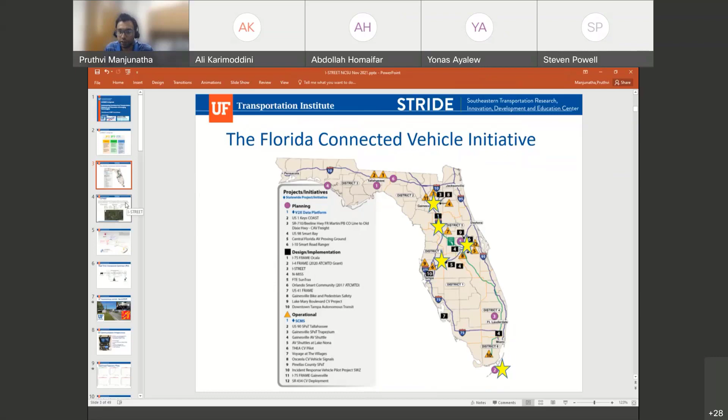We are everywhere. So within Gainesville, this is our live map. If you go to our website, you can see this live map. We try to keep it updated every few months or so in terms of new sensors being equipped, new RSUs coming in, new equipment like radar or lidar. We try to geotag it to a specific intersection or wherever we are using it. As you can see, there are a number of projects going on.

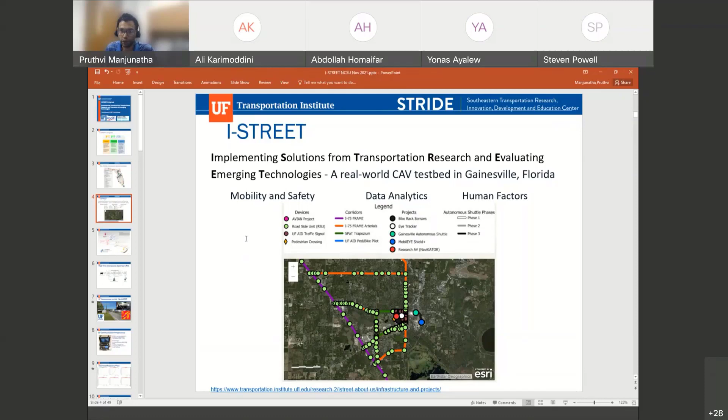So I told you today is going to be more of a story of I-STREET. We'll use this as a roadmap for our presentation today. So this is how the presentation is going to flow.

So we started out in 2017. I'll go through the key projects, and then we'll end up with present day and future. Back in 2017, FDOT was figuring out this CV, AV, and CAV terminology being thrown around, and they wanted us to do a simple literature study to see where the state of the art was at that time, and how to bring Florida to the forefront of this.

So when the conversation picked up in late 2016, early 2017, the city of Gainesville, UF, and the Florida Department of Transportation sat together and gave birth to the I-STREET program. One of the first few funded projects under the I-STREET program was co-funded by both Florida DOT and the National Science Foundation.

What it does is take input from different sensors, be it video, radar, lidar, or DSRC signals, and fuses them all together to come up with a reliable vehicle arrival stream. Once we get that reliable vehicle arrival stream, we have developed a system of optimization algorithms to come up with two different things.

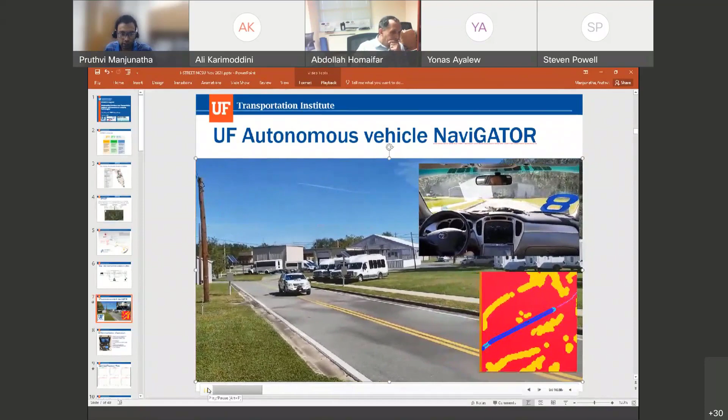So this is our custom AV. We also came up with our own custom OBUs — we built this radio kit ourselves. Then we took it out to the field and did the testing at the DOT facilities.

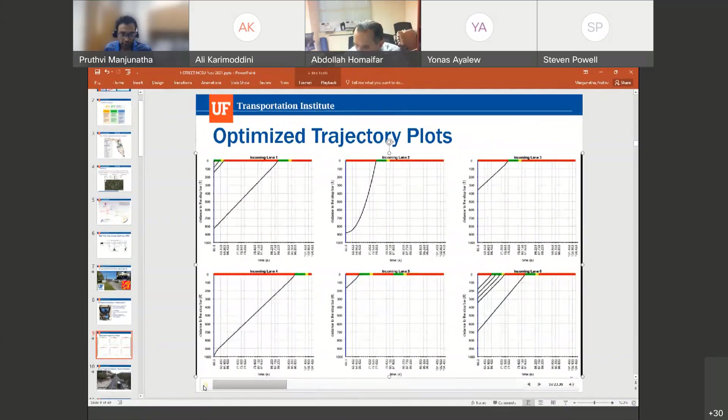So this is how a typical output of recommended trajectories looks like. With every iteration of the software, we are thinking about the best way to design these trajectories for smooth movement, without having to run the optimization routine n number of times. We are always trying to improvise on how this trajectory planning looks.

This is a co-funded project by FDOT and NSF, and we got funded again a couple of years ago to add pedestrians and lidars into the mix. So this is a living, breathing project we intend to keep going.

So once projects like that were born, FDOT also funded the I-75 FRAME project, where FDOT installed a number of roadside units on selected sections of I-75, as well as the arterials that connected to I-75.

Following that, FDOT funded multiple projects. One is the Gainesville SPaT Trapezium project, and the other is the Gainesville Pedestrian-Bicyclist pilot, which is basically a number of CV applications related to pedestrians and bicyclists.

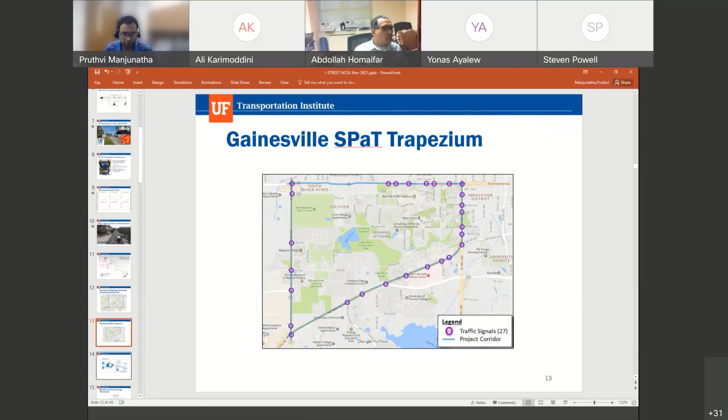So we developed this data pipeline to automatically get not only the roadside unit data and logs from the roadside units, but also use ATSPM data and loop detector data. All of this gets pushed into our AWS cloud, where we store and process it, and we've developed an algorithm to convert loop detector data into turning movement data.

Once we manually edit each signalized intersection and run this algorithm, it automatically generates turning movement counts from the loop detector data and any other sensor data that is stored on our cloud.

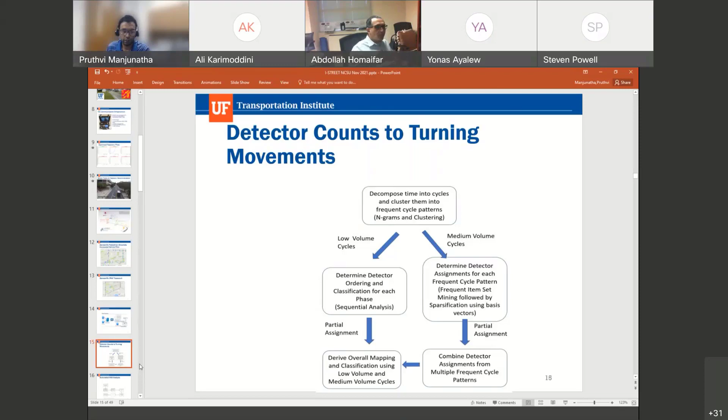So since we work with the McTrans folks who are associated with UF, who housekeep the highway capacity software, we also have access to the backend of the highway capacity software.

So what we've done is created a system where we can automatically convert loop detector data into turning movement data, which is then automatically input into our highway capacity files for each of these intersections. Whenever we want, every month or every week, we can monitor the level of service of all of these intersections, so instead of just doing one before and one after period, we have n number of after periods, and we can do a continual evaluation.

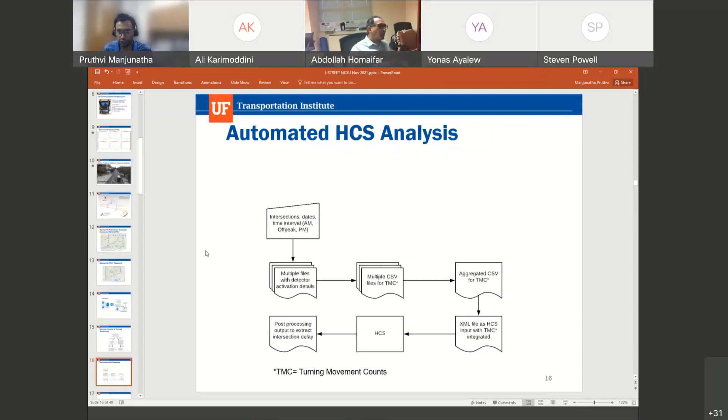So we developed this tool, and we used it for this project to monitor the health of this trapezium network over a period of time. I also have some interesting results to show from this study.

But now that we have this tool, we can just, with the click of a few buttons, continue to keep monitoring this network for however many months we want at a relatively low cost, and keep seeing the effects of such a CV deployment over a period of time.

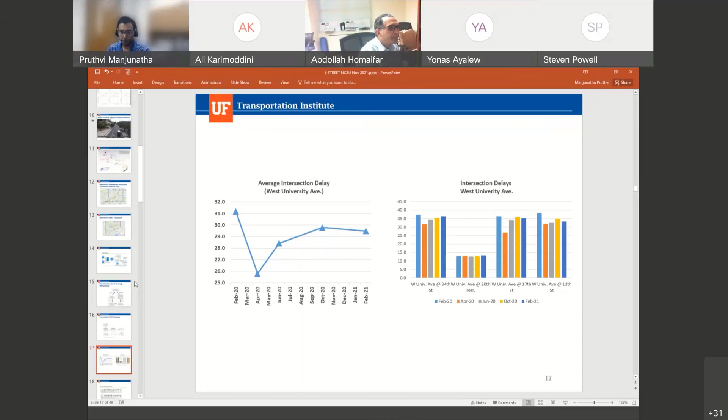We also interviewed the onboard unit users. Some of the things we found out from the interviews was that the OBU interface itself was very primitive, but the users still found it helpful, especially when it comes to warnings from pedestrians and bicyclists. UF campus has a lot of bicyclists, pedestrians, as well as scooter users. So the drivers said the warnings were actually helpful for them to be more cognizant of other road users, other than just other cars on the road.

They also had suggestions for us, saying that instead of just a visual-based system, having an auditory input would be useful. And also if the OBU was integrated with an existing navigation system, they wouldn't have to use two different things for their GPS and the warnings. Those were some of the OBU experiences. Overall it was positive, but there was definitely room for improvement, as indicated in our focus groups.

I'm going to take a small break here. Now that I've discussed these couple of projects, I want to see if there are any questions now, or if you guys want to keep the questions till the end.

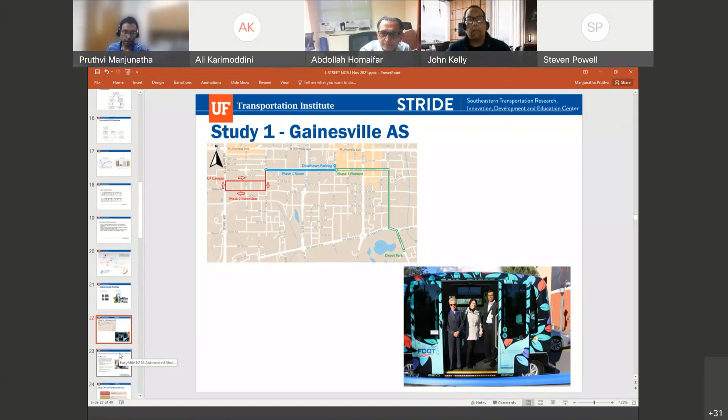If you're in the world of connected and autonomous vehicles, everybody knows there are basically 3 major shuttles in the US. One is the EasyMile shuttle, the other is the Navya, and the third is the Olli. Right now, I believe EasyMile is number 1, followed by Navya, and Olli is catching up with them soon in terms of the number of deployments across the US.

Most of these shuttles, although they say they can go up to 25 miles per hour, actually operate anywhere between 10 to 15 miles per hour. This is because the more elements there are on a road network, the slower the shuttle is to react.

I talked to the shuttle operators, the EasyMile folks and the Navya folks. The common message I'm getting from all of them is that the limitation is because of the capability of the sensor suite. If they have a better sensor suite, they can operate at 25 miles per hour, but the cost doesn't work out right now. So the short answer is, although they say it goes 25 miles per hour, if you look at any deployment in the US, it's typically 10 to 15 miles per hour.

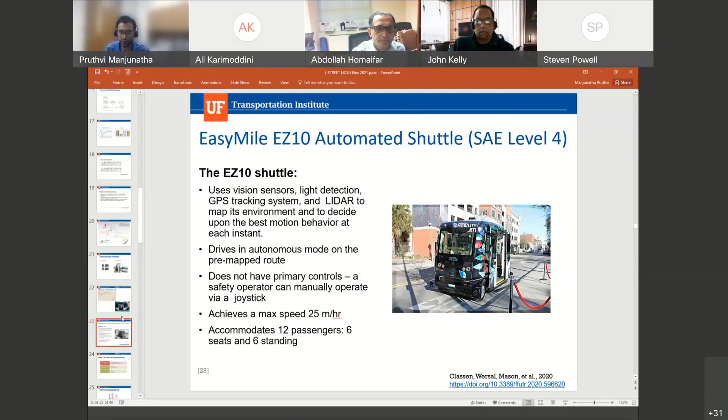That's going to be an interesting thing as I talk about this study.

In our survey, we concentrated on 3 different categories: travel behavior and technology use, and participant demographics. As far as the shuttle is concerned, most studies in the literature only care about the shuttle riders themselves, and don't survey how a driver or pedestrian would feel if they had to interact with a shuttle. So those two components were added in our survey compared to the literature.

Here are some interesting results. In terms of survey demographics, our after-survey had to be done in the post-COVID era, so most of it was online, though we did leave some QR codes on the shuttle itself and at the shuttle stop. What happened was we got way more women responding in our after-survey, because the literature shows women tend to respond more when the survey is online, and also because college students were not as present in Gainesville during the post-pandemic era - so the under-25 demographic went down in our survey.

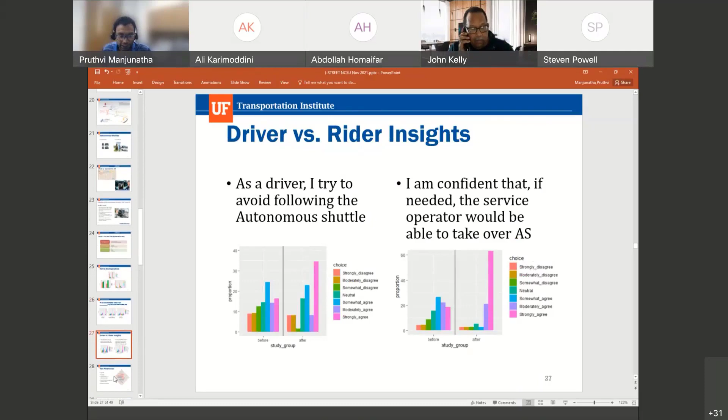In Gainesville, we also traditionally have this east-west divide. The west part of Gainesville is high income, majority white neighborhoods, and the east part is low income and minority majority neighborhoods. These comments mostly had to do with traditional Gainesville issues rather than the shuttle itself, questioning why the authorities are spending so much money on the shuttle rather than improving the bus service in my area. Those are the sorts of questions we were getting.

But this is a misinformed opinion, because this was not funded by the city of Gainesville. This was funded by the Florida Department of Transportation. If Gainesville said no, they very well could have taken this pilot somewhere else. So it's not that those funds could have been used to improve the local transit service. Again, this comes down to miscommunication between the authorities and certain neighborhoods.

I'm talking more about this because we also did a study in parallel to assess the mobility and accessibility in different neighborhoods in Gainesville. We found even in that focus group and survey that this was a common factor. Many of the surveyed, they didn't even know that Gainesville had a driverless shuttle, even though this was the after survey. And because of COVID, we also had some concerns about social distancing and shuttle size and so on.

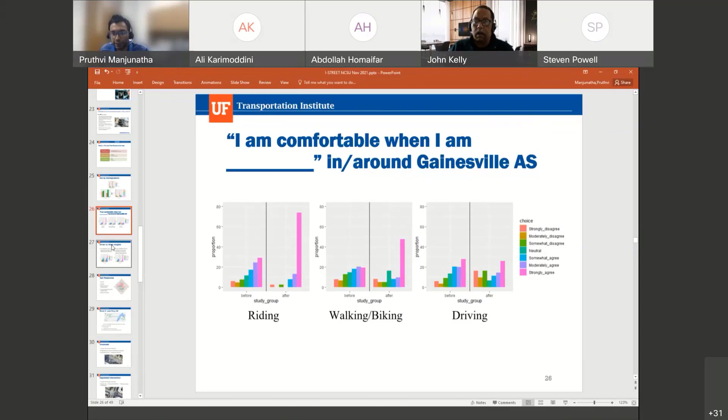Okay, so for the second study on the autonomous shuttle, we went to Lake Nona. Basically, we put up static cameras—we took permission from the township and the operators to do this. We put them in three different locations: a crosswalk, a signalized intersection, and an all-way stop intersection, to see what sort of behavior we would observe. We did this over a period of 2 days when we had relatively higher foot traffic from pedestrians.

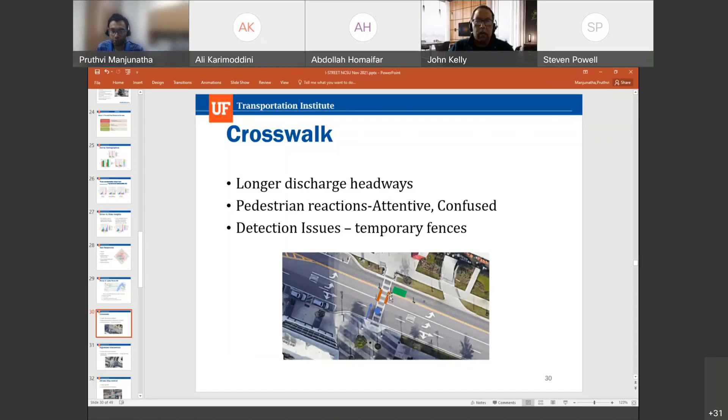There was a temporary island created because on farmers market days they have way more pedestrians. So they put up these temporary fences that created an island for the benefit of pedestrians, but that messed up with the detection of the shuttle. So the shuttle was often getting confused. Sometimes it would stop thinking it's a pedestrian, sometimes it would just go.

And when it came to signalized intersections, because the shuttle was so slow, we saw this multiple times: even before the shuttle, which has a green light, would go through the intersection, the vehicle behind it would make an illegal passing maneuver inside the signal box, because of the slowness of the shuttle.

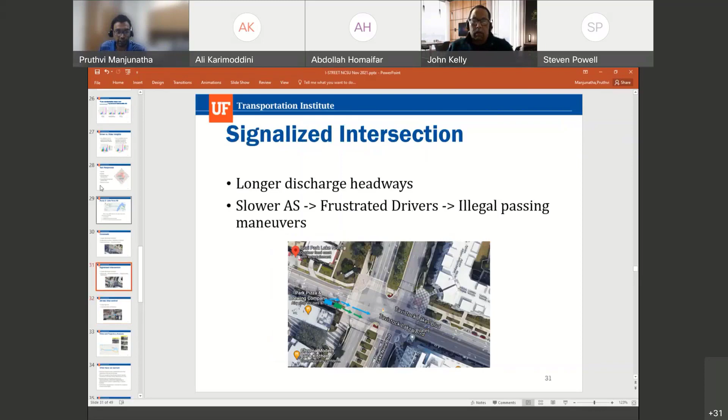And that dedicated lane also intersects with the traffic intersection as well, or no? The dedicated part is actually between this all-way stop and the signalized intersection. I can show you on the map - this is the intersection and this is the all-way stop. So I believe a small section in the middle has been remarked as dedicated right now. Okay, I see, thank you. Great question.

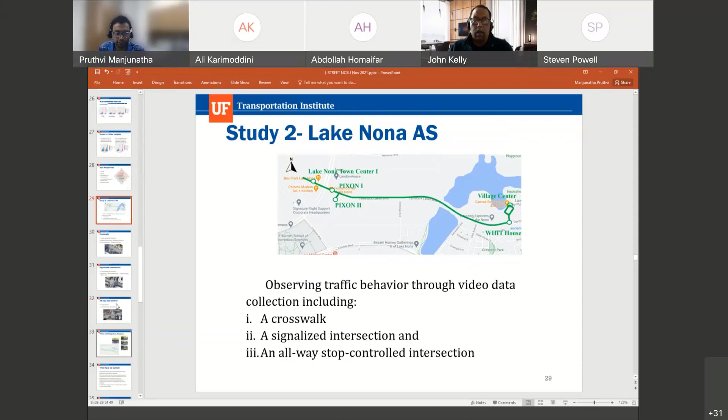Along with the video, we also had videos that we took ourselves. We also had access to the shuttle video facing outwards - of course they couldn't give us the shuttle video facing inwards because that would be a privacy issue. So we got the videos from the shuttle looking outward, meaning we were able to capture the vehicle following the shuttle, the human-driven vehicle following the shuttle.

We also got the trajectory data of the shuttle from the GPS mounted on the shuttle. So when we combine the trajectory data with the video data, we can come up with leader-follower trajectory. When we have both autonomous leader and human-driven follower trajectory, we have a dataset to model human-driven vehicles. We use a combination of image processing and trajectory manipulation to come up with this trajectory data - it's still a work in progress. We are planning to model human-driven vehicles in the presence of autonomous vehicles using this data.

Should I say that this is studying the behavior of a driver when it's stuck behind a slow autonomous car?

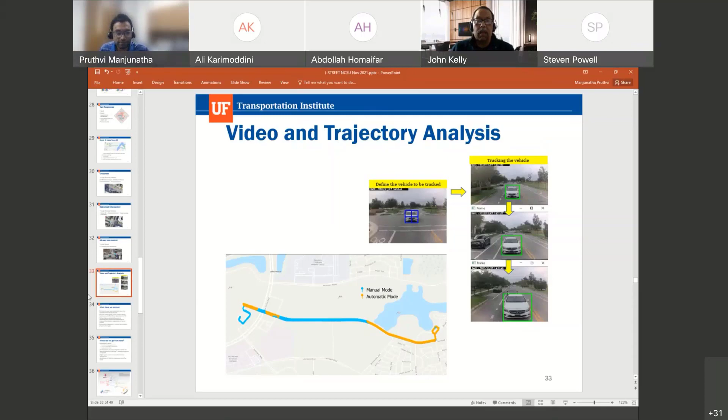they should be able to use our methodology to model such a follower-leader relationship. So what we learned from both studies is people are getting used to this technology and warming up to the idea in a positive way. The major concern is the slow speed of the autonomous shuttles right now.

For both studies we had to work with multiple stakeholders. With Gainesville, it was EasyMile the shuttle company, Transdev the shuttle operator, City of Gainesville and RTS as the transit agency responsible for the entire project. Siemens folks provided the RSU signals, and with Lake Nona, we had to work with the Tavistock Township folks and the operating company Beep.

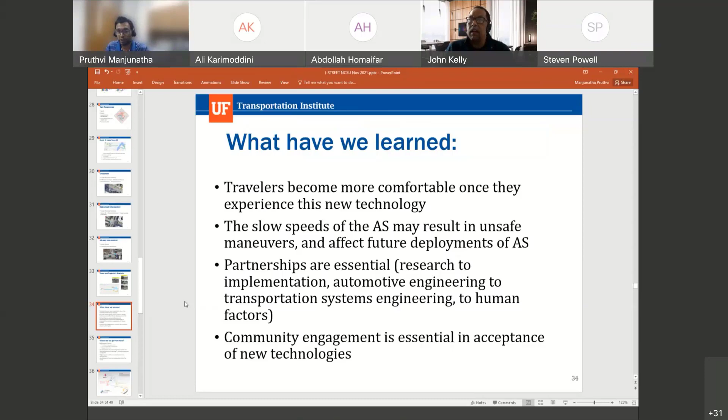Having this relationship is extremely important, not only for smooth operation of the shuttle itself, but also to do any kind of research and evaluation, and taking these pilots from being just a pilot to where it will lead in the future eventually. Community engagement is very essential, and communication is key.

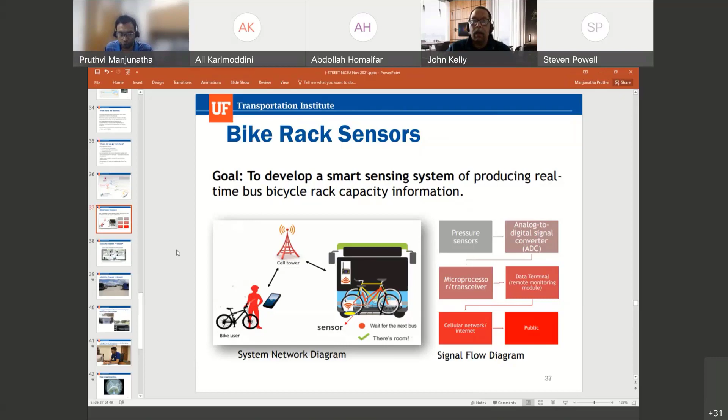So we did something called a bike sensor project. The city buses have a bike rack in them, and because there are so many bikers in Gainesville, a lot of the time people are not able to get onto the bus because the bike racks are full. So what we did was put sensors in the bike racks and created an app where people could see not only whether the bus is full, but also whether it has an empty bike rack, so they don't wait unnecessarily. We also had a Mobileye ADAS system on our RTS buses.

The Mobileye Shield Plus is a warning system for bus drivers, for pedestrians, forward collision, and other warnings. We did a quick evaluation study, and this is a quick video for the Mobileye system. As you can see, whenever there's a pedestrian crossing, usually a warning pops up and the driver gets to know. There are multiple applications for this system.

We also did a study on what is the best way to send warning messages to the drivers. So we used two different apps, Travel Safely and one more app, I forgot the name.

We ran the vehicles through a school zone as well as a bicyclist zone where we had bicyclist participants. We put eye trackers on the drivers and made them drive through the school zones where the bicyclists were present, so we could capture the eye gaze of a driver when they're driving through a school zone. We were able to see for how many seconds they're looking at the app, for how many seconds at the pedestrian, and how many seconds at the road.

We did it in three different modes. One was a stealth mode where we didn't give them the app. The second was an audio-visual mode where we put both audio and visual warnings. The third was an audio-only mode where we didn't give them the visual app, only audio messages. We found that audio messages were extremely helpful to streamline gaze time. If we just send visual messages, they will look at the app more than the road, which can be extremely distracting and defeat the whole point of having the app.

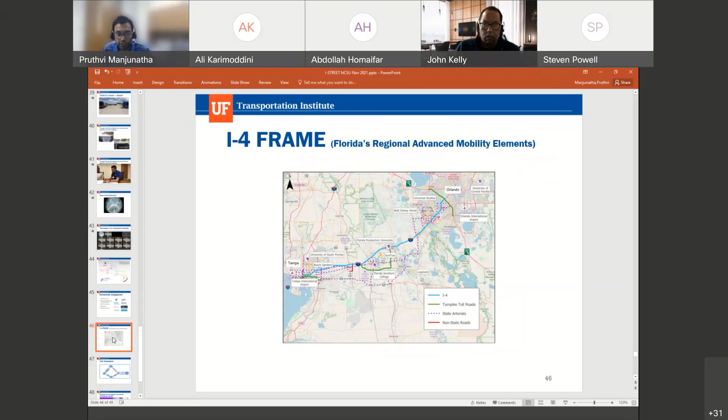We are working on how to simulate CAVs in VISSIM, since VISSIM is a widely used simulation software. We've come up with a framework to simulate CAVs in VISSIM, and we continue to work on how to efficiently do this and answer a lot of questions related to simulation.

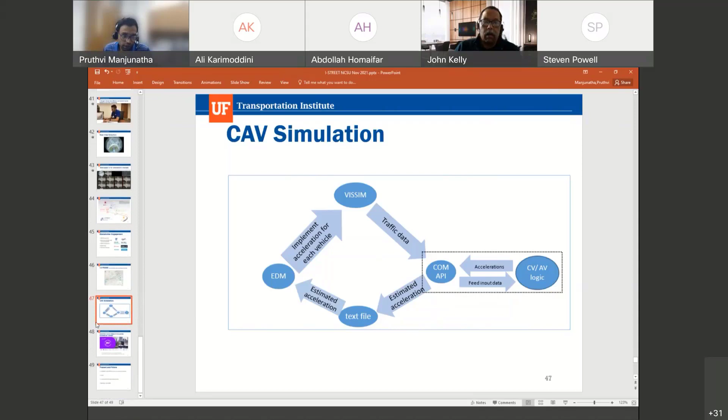We held what is called a mobility challenge event with COMOTION folks. COMOTION is a new cities initiative that holds two major conferences a year, one in LA and one in Miami, around the topic of mobility and how to use technology to improve it. This year the primary panelist and guest was Secretary Buttigieg. The event happened in Miami, although he participated virtually. One of the key sessions was the COMOTION Mobility Challenge event.

We invited everyone from the world and gave them a data set. We told them to use this data set however they could to come up with some sort of safety or mobility solution. Nine teams submitted proposals out of the 15 teams which showed initial interest.

Three teams were chosen as finalists and one was picked. That team is right now working with the City of Gainesville on a prototype for a safety intersection dashboard.

We are doing a number of projects. As far as the present and future of I-STREET is concerned, we recently rebranded ourselves as a living lab because we are growing exponentially every year, and we are redefining who we are and what we do. We see a bigger role for ourselves within Florida as well as nationwide when it comes to CAV or any emerging technology.

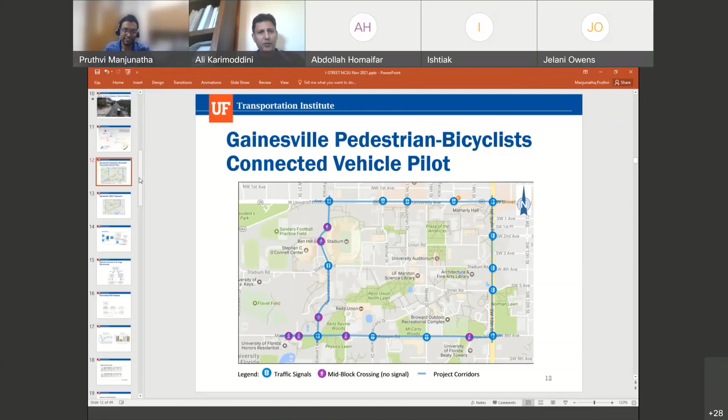Hi Pruthvi, great presentation. I enjoyed learning more about the detailed initiatives through iStreet. I was curious about the perspective of University of Florida and Florida DOT looking into the long term, specifically integrating some of these pilots with predicting how behavioral changes would be. How many years are we looking into for predicting the plans or transportation? I'm just curious.

Hi Venkatesh, nice to see you after a long time. So Dr. Sanjay Ranka, whom I mentioned from computer science, he is actually coordinator for a lot of data aspects of these CAV projects.

Even projects that iStreet isn't evaluating, like USF or other Florida universities, Dr. Ranka from UF is typically involved in the data component, because Florida DOT has this vision within the iStreet program of having a data analytics wing where we not only ingest and process a lot of data, but also use it to start predicting where bottlenecks are likely to come, what kind of traffic patterns are predictable, and things like that. I believe his team has already developed a small prototype for Seminole County in Florida with whatever data we had, so the idea is to make it a bigger thing as we go forward.